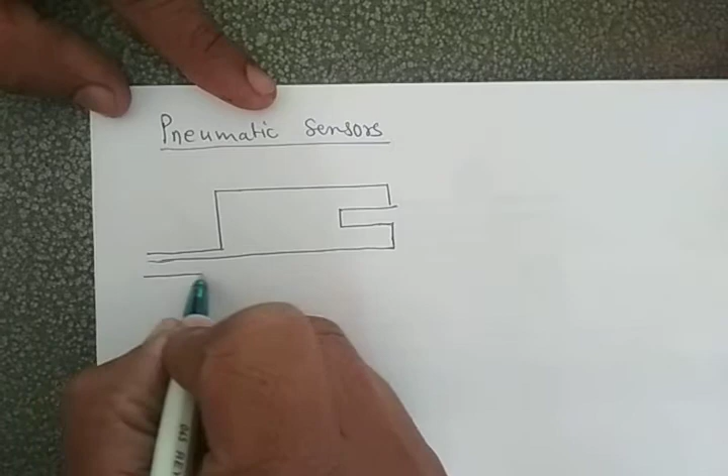Pneumatic sensors are called to those sensors where air is used. Now, how the air helps to sense something, that we are going to study today.

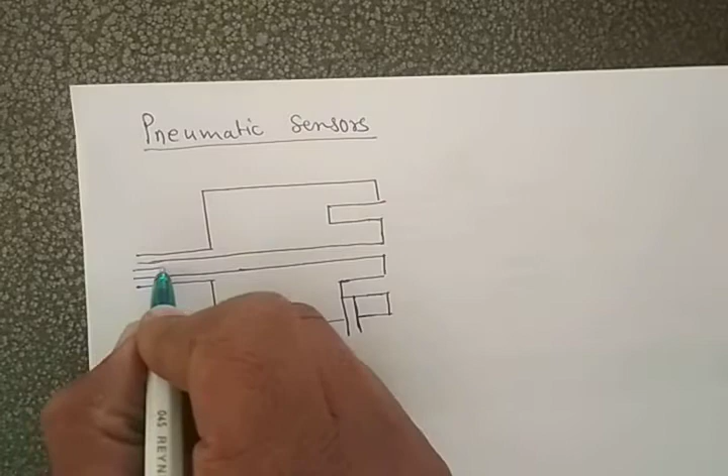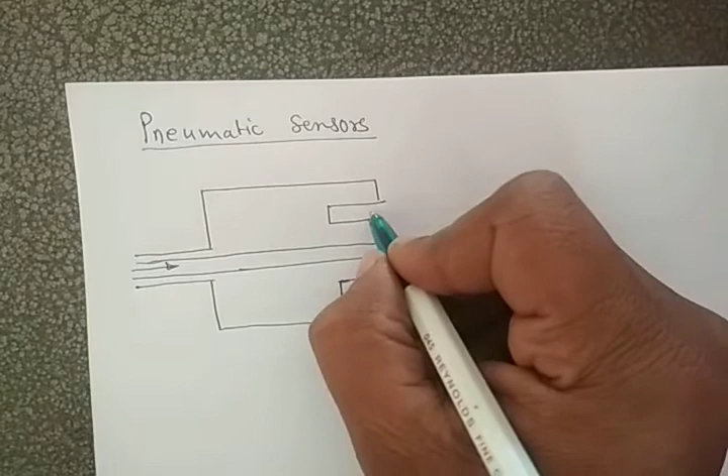This is how a pneumatic sensor looks. From here we provide air pressure, pressurized air, and from here low pressure air we supply, and it comes out from the sensor like this.

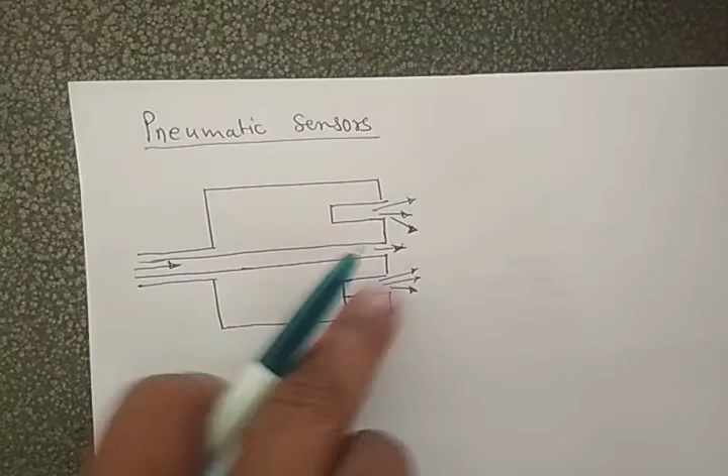Now what happens when there is no object in front of that sensor? It doesn't do anything, meaning the pressure of the air remains the same and is constant throughout the working. And if you put any object in front of this, what happens?

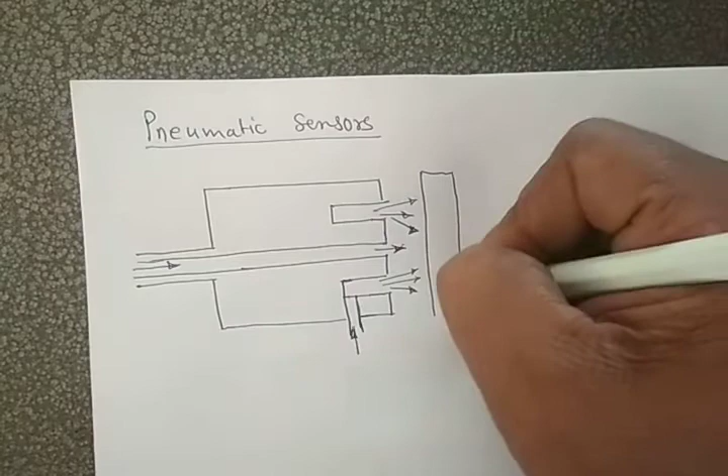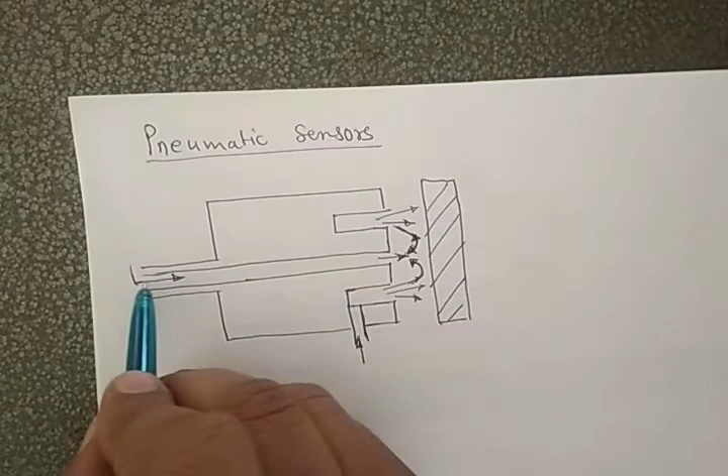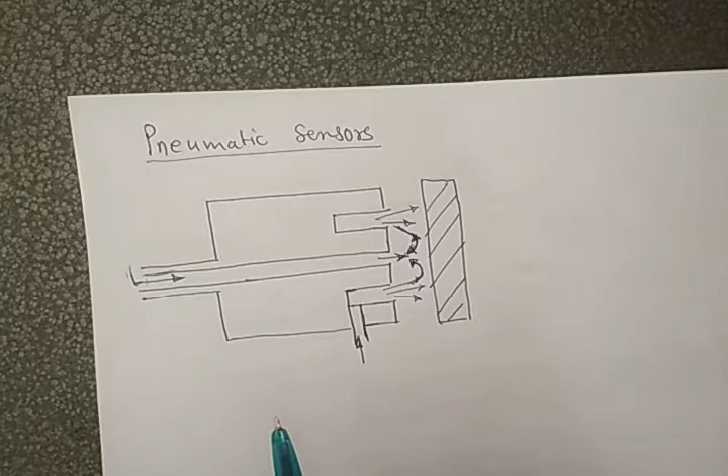If you put any object like this, the pressurized air will go back like this, and the pressure at this point gets raised. When the pressure at this point gets raised, we can say that something is present in front of the sensor. This type of sensor is used to measure or sense the presence of any object.

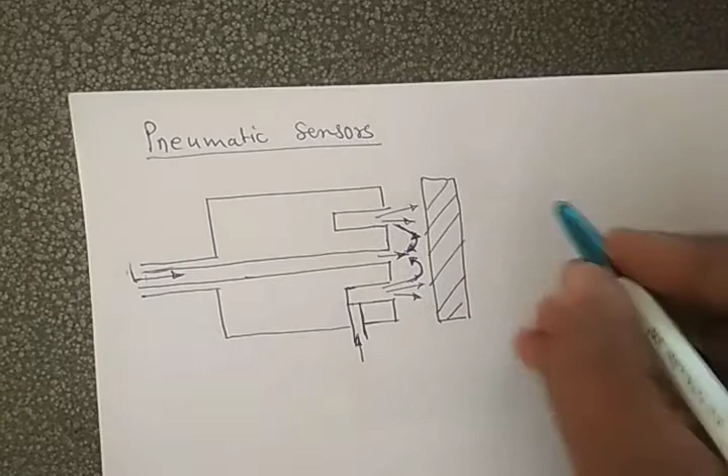The range of this sensor is from 3 mm to 12 mm. Meaning, from 3 mm to 12 mm we can sense if any object is present.

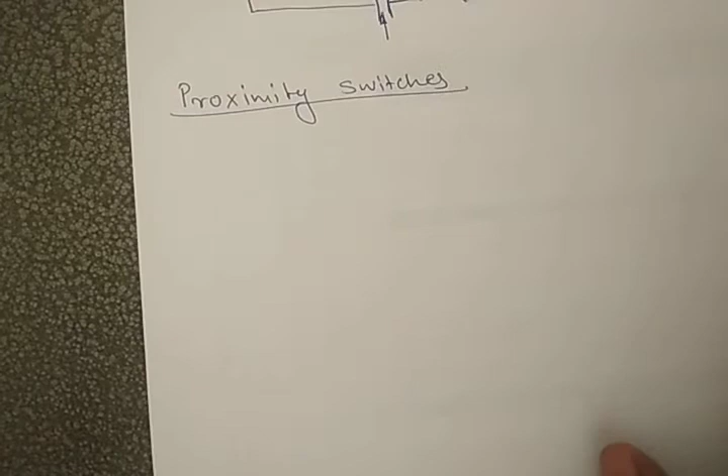After this we will see proximity switches. Proximity switches are those which sense the presence of any object. If something is present, then the switch will get on, or if nothing is there, then the switch will get off.

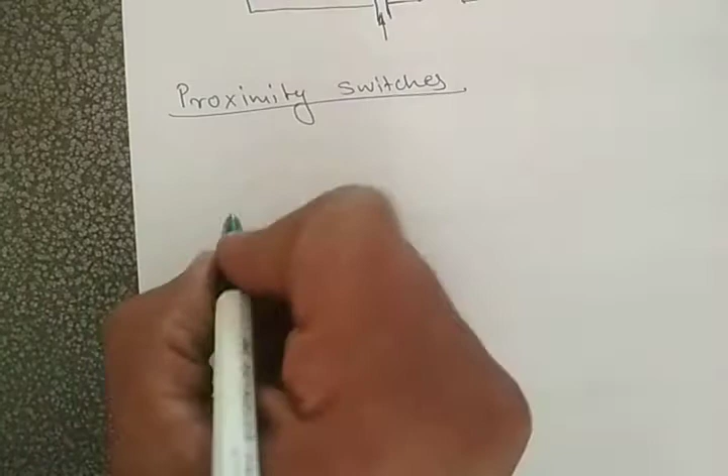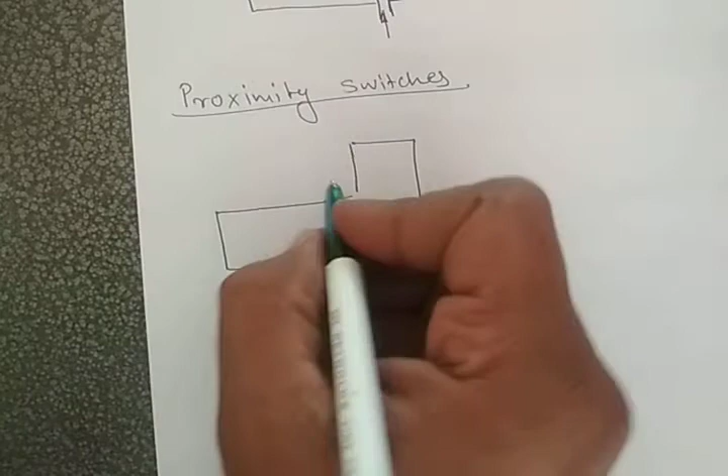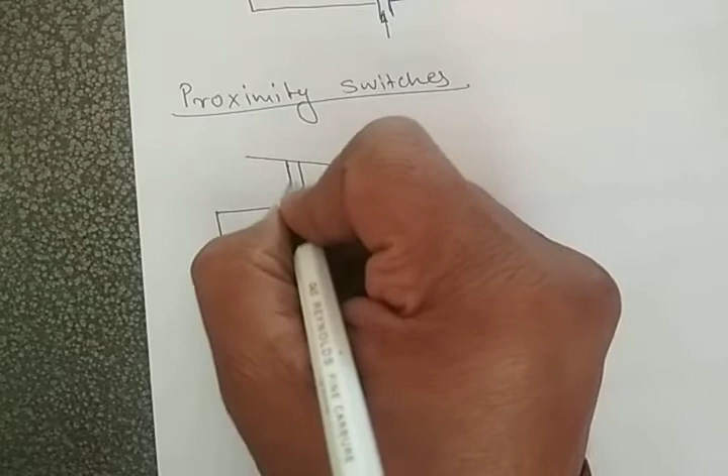Now how does it look like? It looks like this, I'll draw one diagram. This is the lever, and here is the rod which helps to turn the switch on or off. Here is the switch.

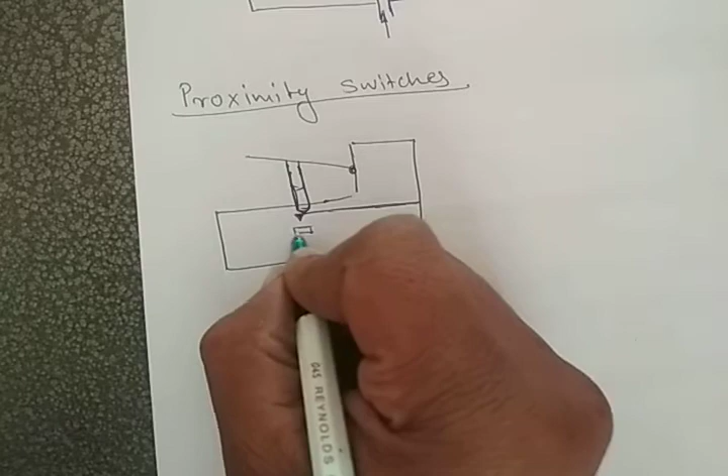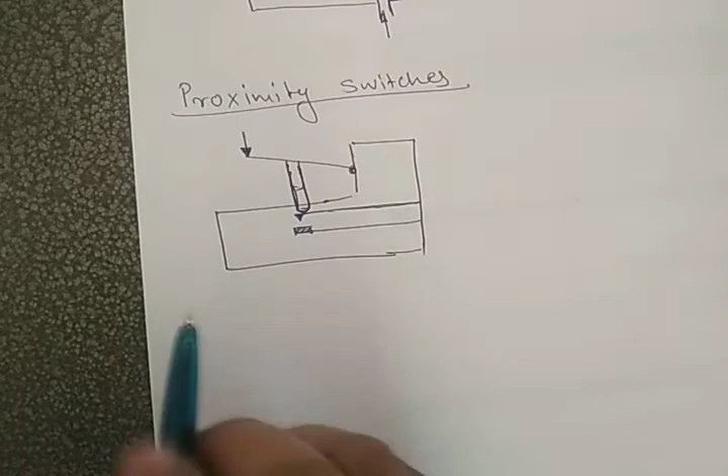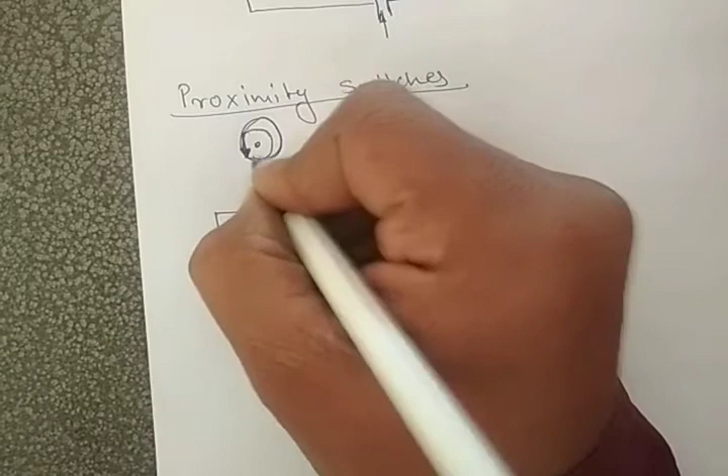Now what will happen? If something is present, the lever will get pushed down and the electric contact will get on. This type of switch is also operated by a roller, instead of the manual one. Instead of this you can use a roller like this, or any cam like this. So this senses the presence of any object.

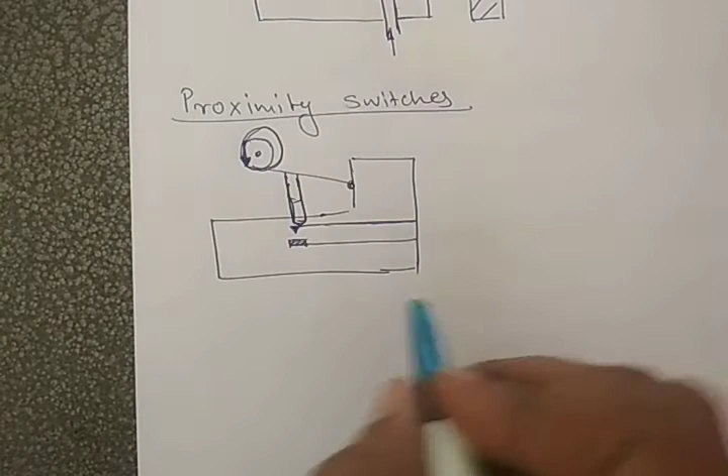Now the switch present in the sensor may also be like a magnetic switch. Meaning, how it works, I'll show you.

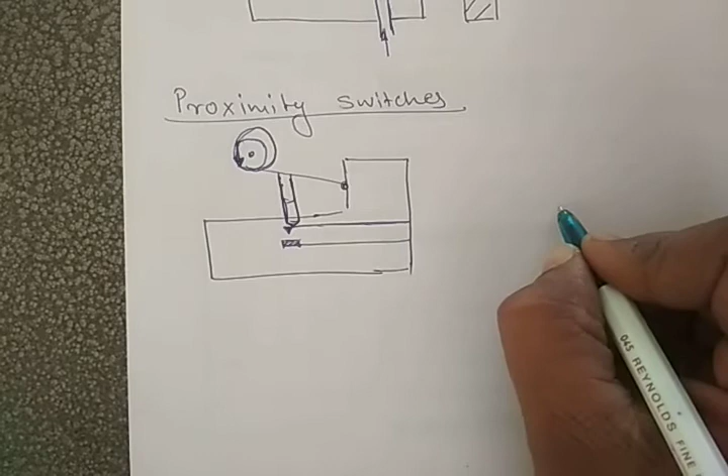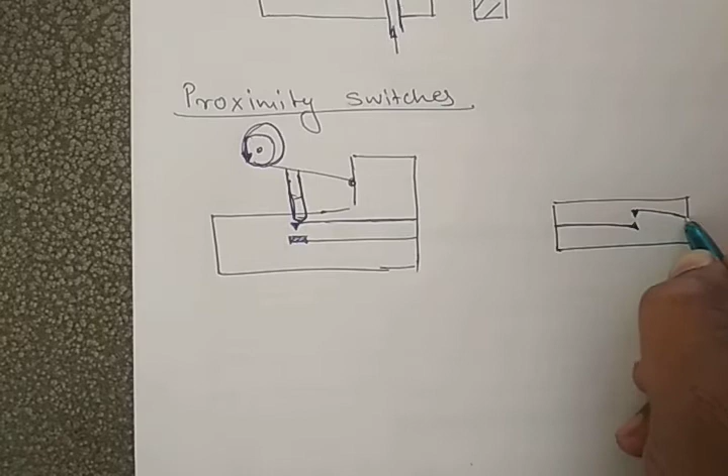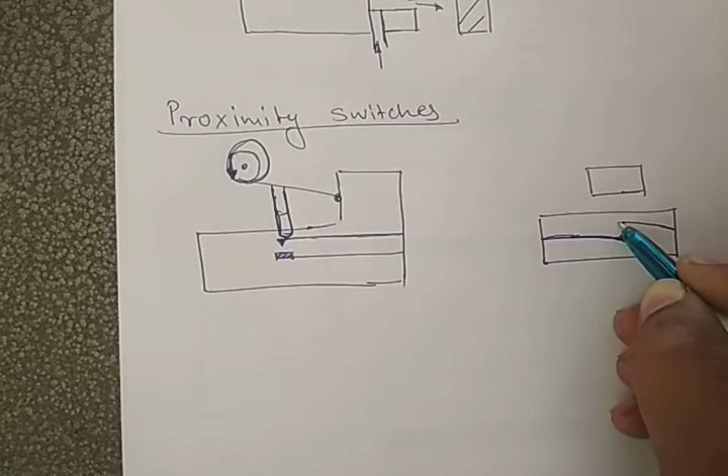When we use a magnetic switch, it looks like this, and the initial contact is not there between them. If you put any magnetic field near that switch, what will happen? The rods will get stretched, and those will make the contact between them, and the connection will get on. So this is called a magnetic switch. After this we will see photosensitive sensors.

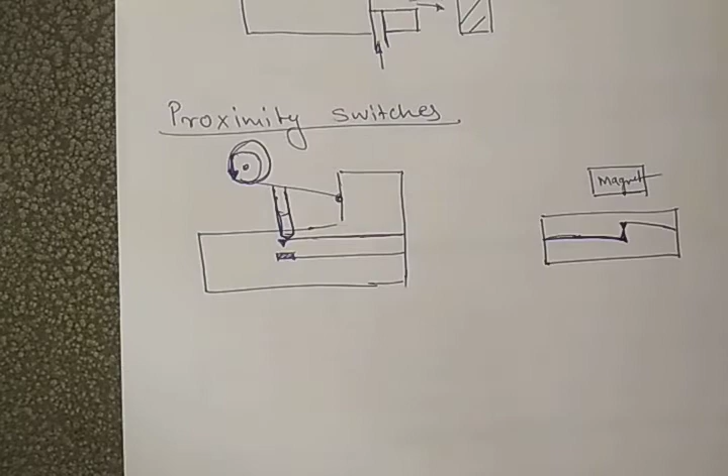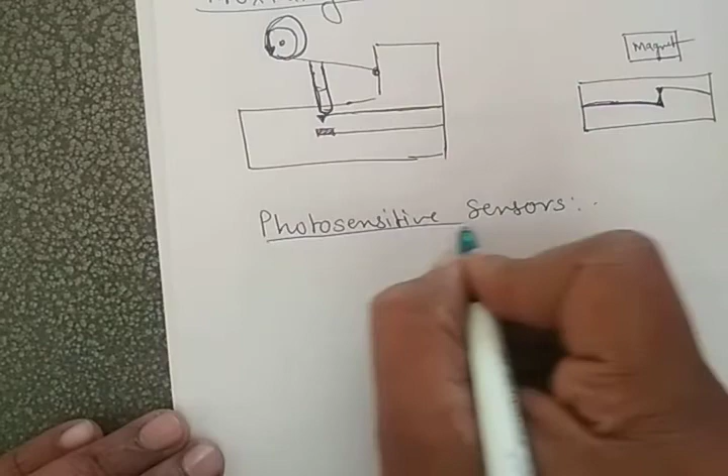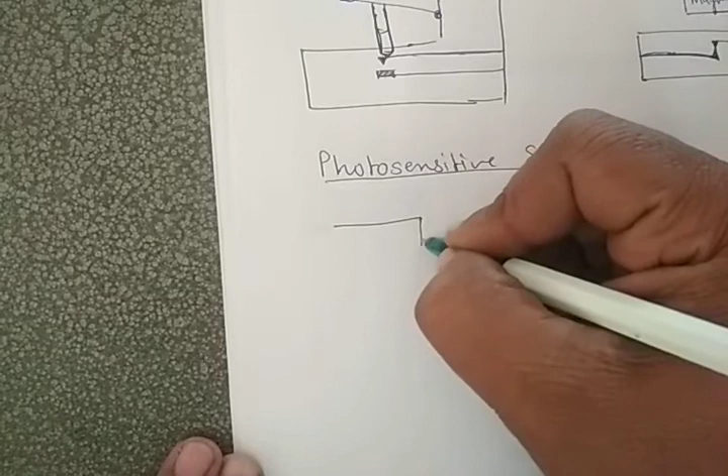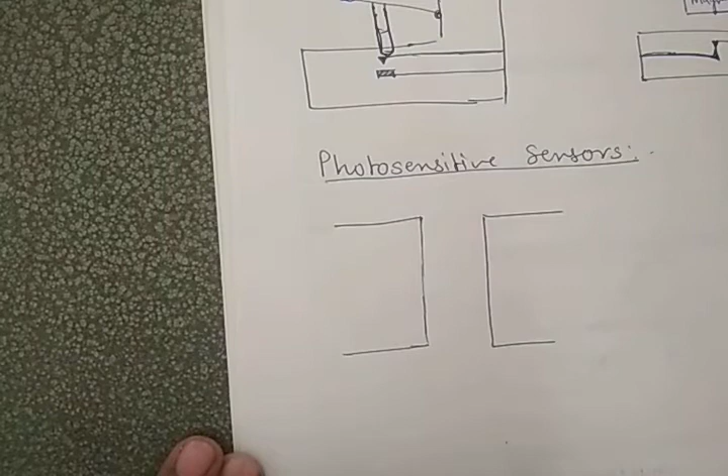Now photosensitive sensors work with the light emitting diode. They look like this. One end is having a light emitting diode, that is nothing but LED, and one is having a photo detector. This is LED and this is photo detector.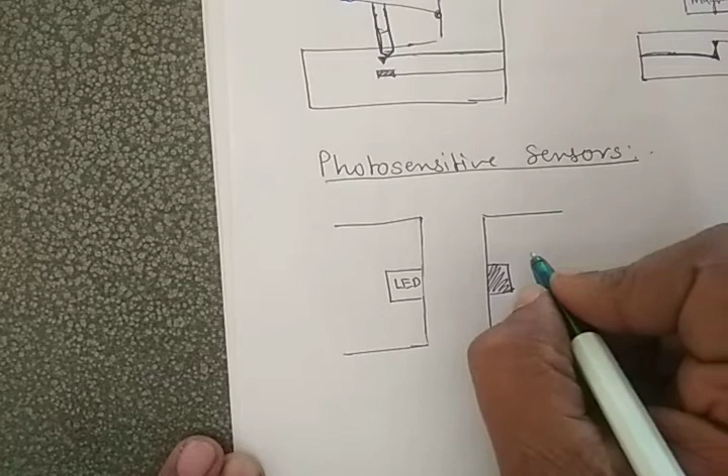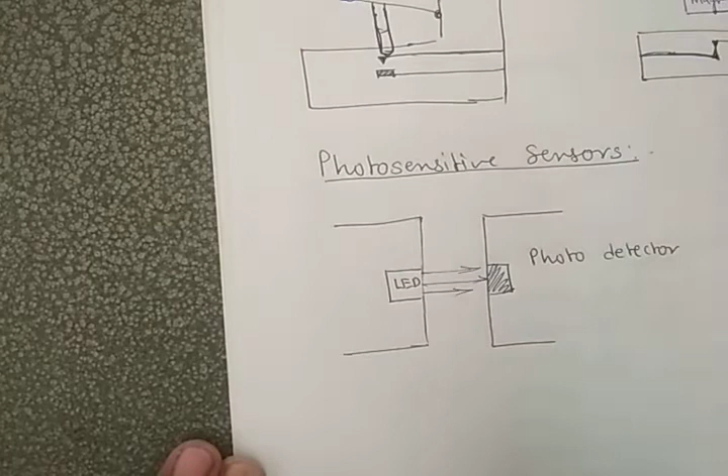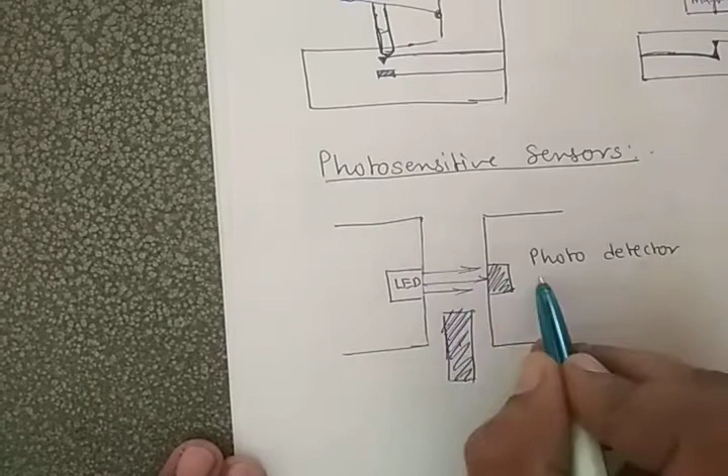Now what will happen? The LED passes light like this, and the photo detector detects the light. Now if you put any object in between them, what will happen? The light will not pass to the photo detector, and this makes us sense the presence of any object. Now the same thing can also be drawn like this.

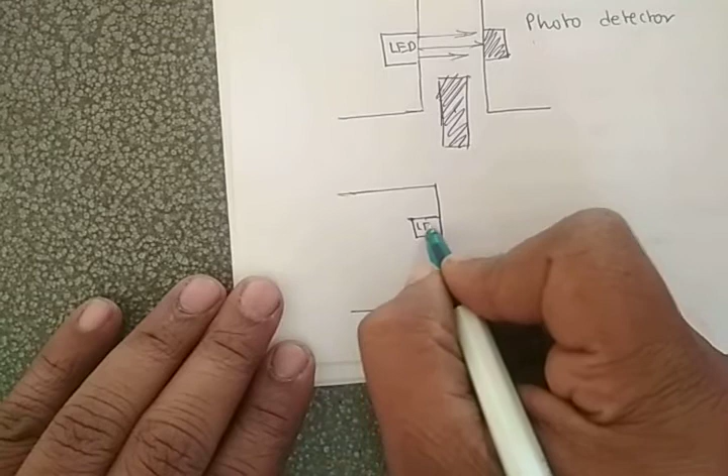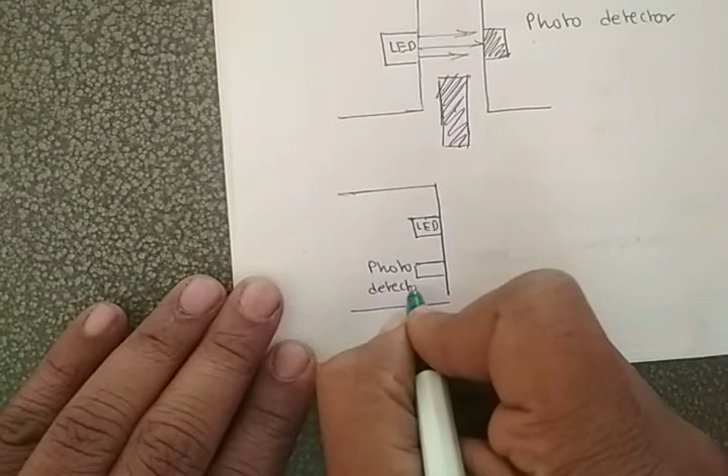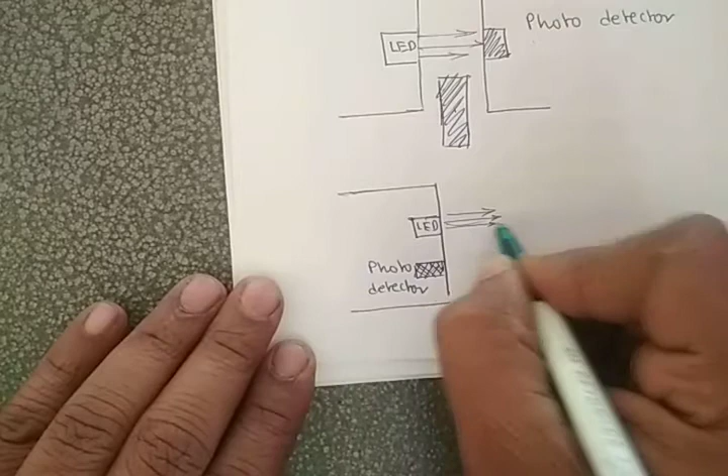See, sometimes they use this type also. They put the LED here, and at the same place they also use the photo detector. Now in this type, what will happen? The LED emits light like this, and the photo detector is here. So how will it sense the light?

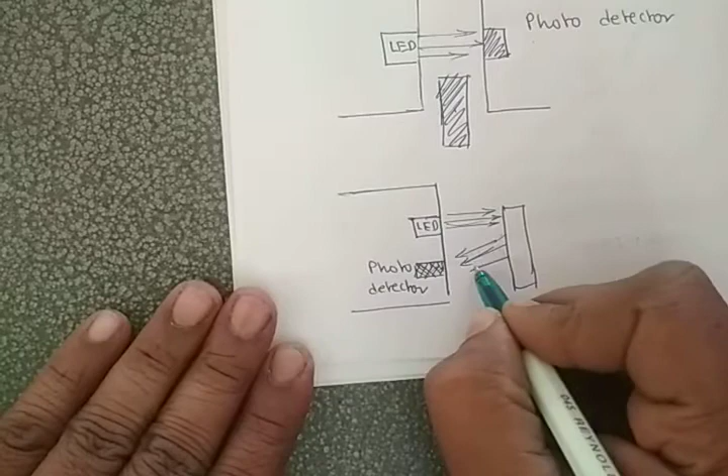When you put any object over here, the light will get reflected, and that reflected light will be detected by the photo detector. This is how the photosensitive sensor works. Thank you.